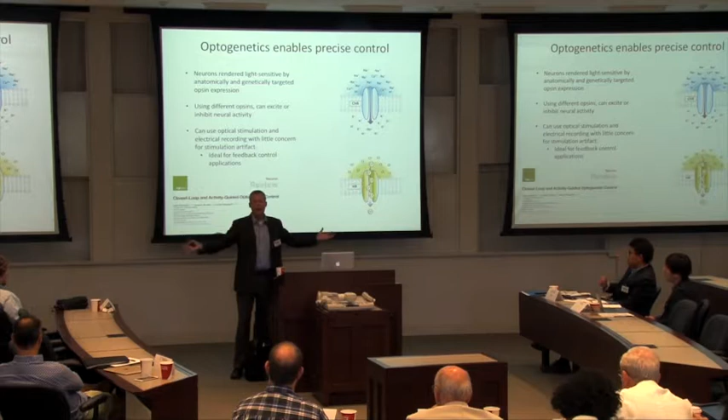What I'm going to talk about is channelrhodopsin, which is an excitatory opsin that we've used. There's a really nice review article for the control folks in the audience from Karl Deisseroth's lab that lays out a lot of different interesting problems and the state of the field. This was from a couple years ago.

In terms of the basic control framework, we have the ability to deliver light, and we have the ability to record from a neuron, acknowledging that with the light we're influencing the activity of many neurons, not just one. But we're recording from a single neuron in this particular example I'll show you.

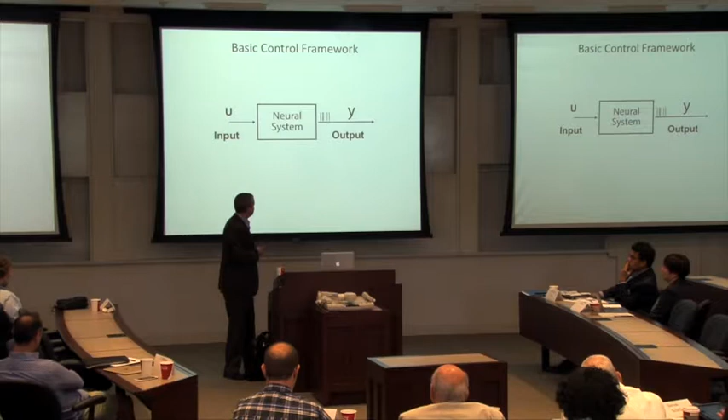So you might first jump into an open loop problem and say, well, it's good enough if I characterize the relationship between light input and firing rate output. There's some kind of static nonlinear function. I can just use it like a lookup table, and maybe I can invert this and design an input trajectory that will give me the desired output trajectory.

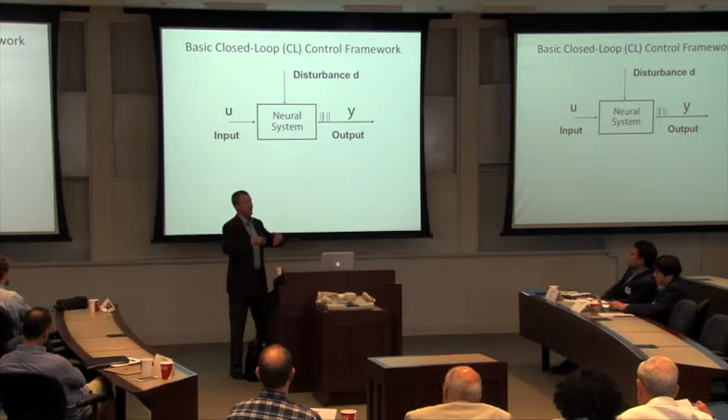And that works well in some cases, but obviously in the face of disturbance, and I mean this in the broadest sense—maybe unmeasurable inputs, for example, which is often the case in the brain, but also maybe more broadly thinking about parameters of the system that are changing over time—the disturbance immediately makes us start to think about closed loop control.

So in this case, we have a disturbance entering the system, but then the ability to measure spiking activity of neurons. We then develop the control strategy around instantaneous firing rate. That's a design choice. We have an observer that translates the spiking activity in real time into an instantaneous firing rate, which we then compare with the reference trajectory, and the controller operates on this error signal.

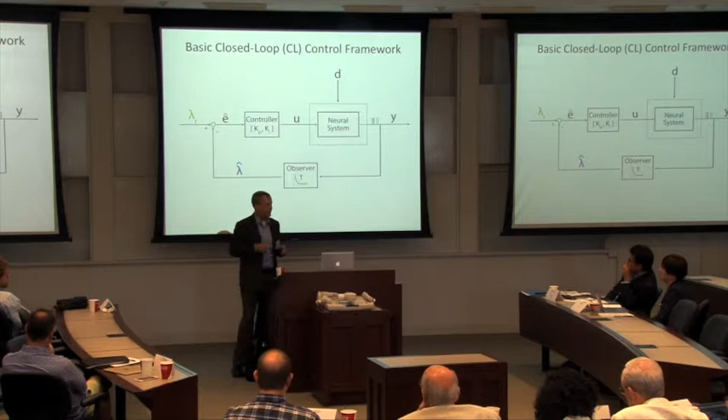And for simplicity, we start with simple PI controllers. There's lots of more sexy things we could do. We have all sorts of ideas on this, but this is a good starting point.

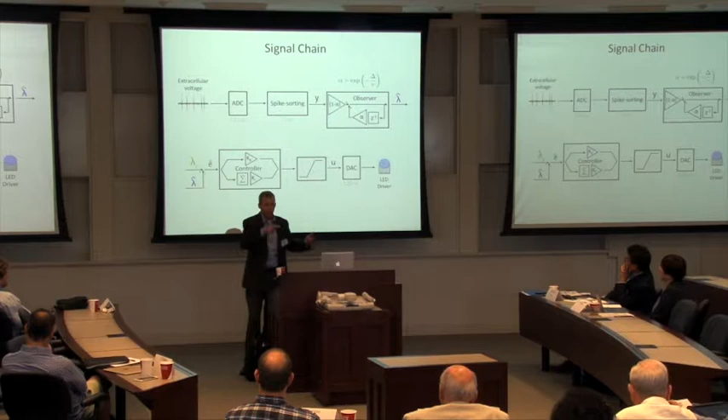So just in terms of the signal chain, there's, in real time, extracellular recordings, A to D conversion, spike sorting in real time, which is tricky, and then the observer. The observer is compared to the reference trajectory, the controller is implemented, and so on. So we've got to turn that around on the order of 10 to 20 milliseconds if we can. Okay, so that's a real constraint on the design.

So just a quick couple of results to talk about. One is, this is a 1 Hz sinusoid. In green is the reference trajectory, that's our goal. In solid black here, the dark black is the closed loop control, and that's the average across many trials, repeated trials experimentally.

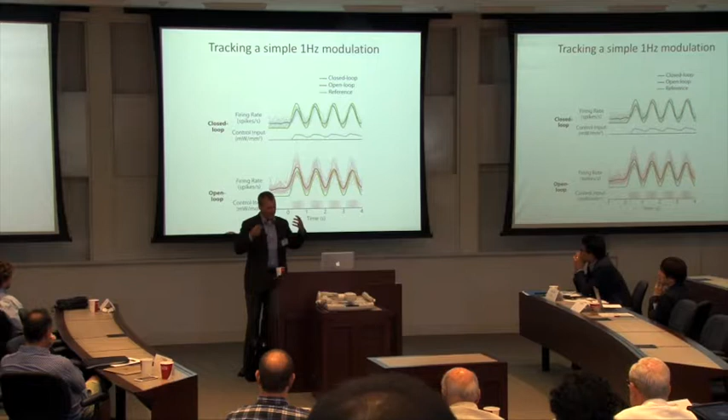The individual trials are shown in light gray. For the open loop shown in the bottom here, we have again the green trajectory is the target, and the thick red is the open loop version. So it's not so bad, right? But one thing to note immediately is that the variability from trial to trial is significantly higher, and that's one thing we've observed in a number of different settings: the closed loop control seems to really clamp down on variability, so we get very tight control of the variability.

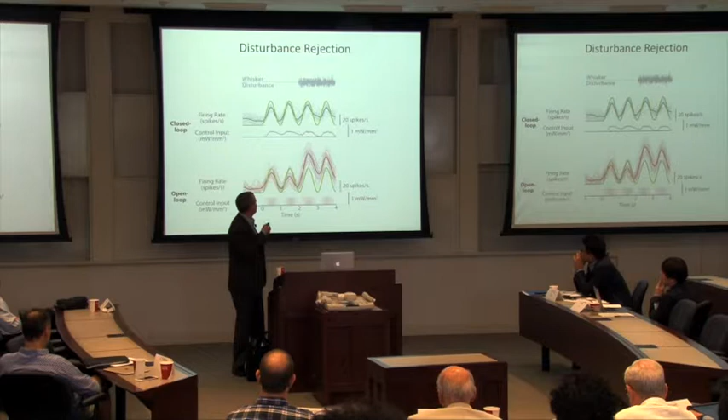So as you might guess, though, the open loop fails when you start to introduce a disturbance. In this case, it's a whisker input, just to demonstrate what this can do. Whisker stimulus starts at 2, wiggling the whisker, driving this pathway. The open loop system falls apart. The closed loop control compensates for that by backing off on some of the input, and you get this tracking of the sinusoid.

Okay, so let me dig in a little bit more and let's talk a little bit about the control setup here. One thing to point you to is that we did publish one paper on this in 2015 with a collaboration with Steve Potter, partly in vitro experiments, but our piece of this was the in vivo. And one of the things we experienced in the neuroscience community was pushback on calling this closed loop control, or at least on the novelty of the closed loop control.

Because in the neuroscientist mind in general, being in the middle of an experiment and dialing up some light level to drive a fiber optic cable in the brain, that was closed loop, right? Meaning that the experimenter's in the loop and that's a closed loop. But we mean automatic. We had to explain repeatedly. So I'm just warning you, when you're trying to publish in this community, you have to be very precise with your language. Don't make any assumptions.

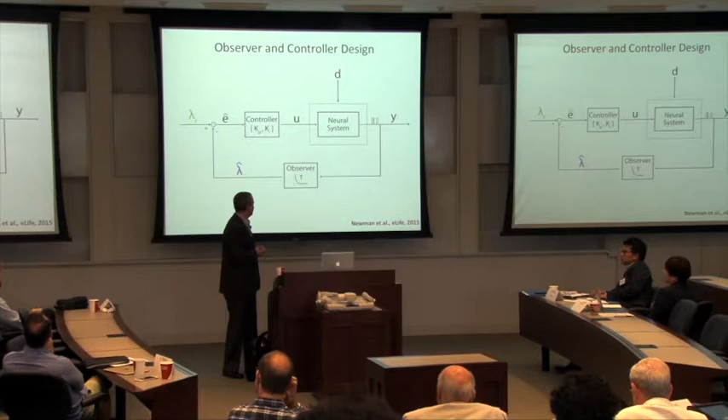So there's two parts of the problem. I won't focus on the observer, it had some hidden landmines in it, but we solved that. It's a little less interesting, and I'll focus mostly on the controller. But just to suffice to say that the observer in this case is really simple: a single parameter exponential filter with a single parameter tau, and we adjusted that to minimize the mean squared error of the reconstruction of the instantaneous firing rate. The more interesting problem has to do with the controller.

And so we built, in the earlier publication, it was all very ad hoc. We got in the middle of the experiment, we started turning knobs on the controller gains. We wanted to be more principled in this case. So we first start the experiment by presenting a white noise light input to the plant, measuring the spiking output, and then fit a model to this.

And this is a simple linear nonlinear cascade. For those non-neuroscientists, for whatever reason, the neuroscience community feels more comfortable when you show a linear filter reversed in time. So these are impulse responses, but they're just flipped in time, followed by a static nonlinear function that has this kind of logarithmic form, and we fit this with maximum likelihood.

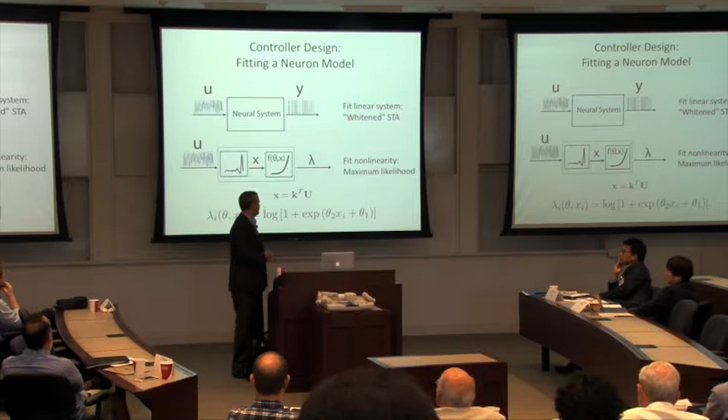So we do this during the experiment really quickly and fit this, and then use the model, which ends up looking something like this, a nonlinear function, linear filter cascade. And we use that to then design the parameters of the controller. The goal, at least initially, was to minimize the integrated mean squared error.

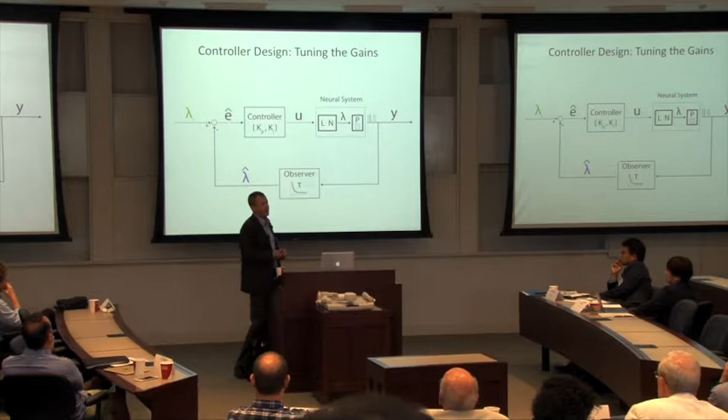One of the things we observed is that the integral component of the PI controller will bias towards the DC, and so you fight that, because the controller really wanted to track just the DC and didn't care about the modulation. So we ended up weighting the DC and the modulating frequency component, with variable weightings that we tuned manually to try to balance out the bias between these. There are probably more sophisticated ways to do this. I'd love to hear some ideas.

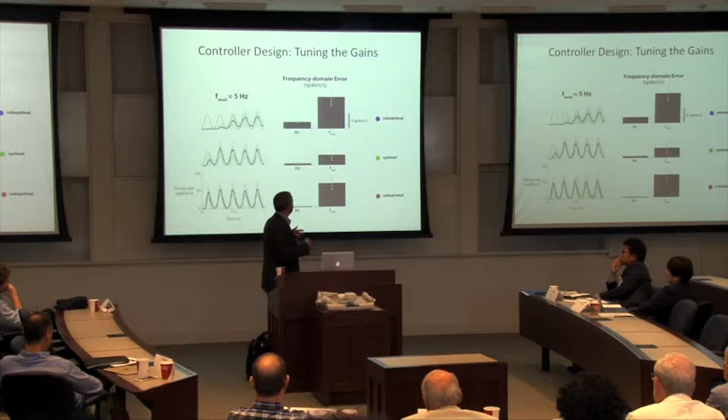We did this to optimize the balance between the DC and modulation, and here's how it looks. This is a 5 hertz sinusoid clicking along. The target is in green, the black line is the experiment, and you see the control effort that goes into this.

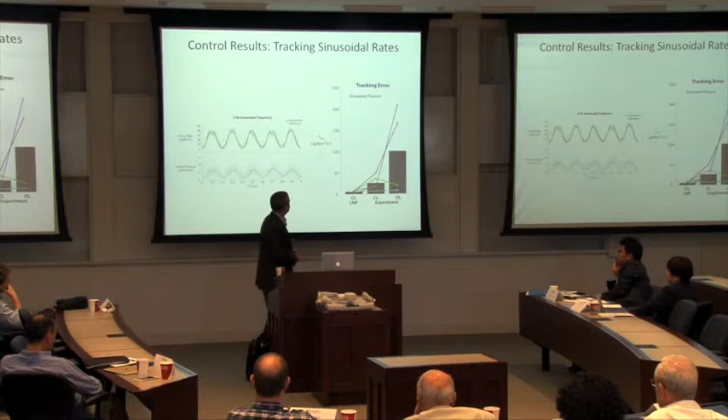In a majority of cases, the closed loop control did about as well as you might expect based on the LNP model fit. So you fit the model and implement that in simulation - it does this well, and the closed loop control in the real experiment does like this. The open loop, in some cases, actually performed remarkably well, but in some cases fell to hell, just completely fell apart.

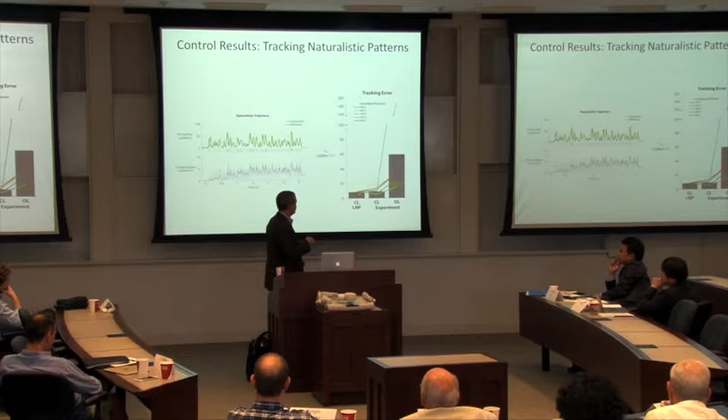In terms of the naturalistic inputs, this green shows the desired trajectory, the black again is the experiment and the control effort. Again, the closed loop control strategy did as well as you might expect compared to as well as you could possibly do based on the LNP model. And then the open loop just didn't do really well at all.

Okay, so I wanted to get to this, what we thought was an interesting thing that opened up here. The model's being used to guide the design of the controller, and obviously there are more sophisticated things you can do here. But one question we had is, well, how good does the model need to be?

One thing I'd like to share is that modeling in neuroscience is actually really - the models are terrible. And one of the things that's really interesting is that there's a lot of model building, but not a lot of model testing. So you read a paper, they develop a very complex model, but in terms of evaluating the actual output of the model compared to experimental data, you often see that step skipped for whatever reason. It's not clear. And when the models are compared, we find that many models, even in the most well-studied parts of the brain, are just terrible. So just brace yourself for that.

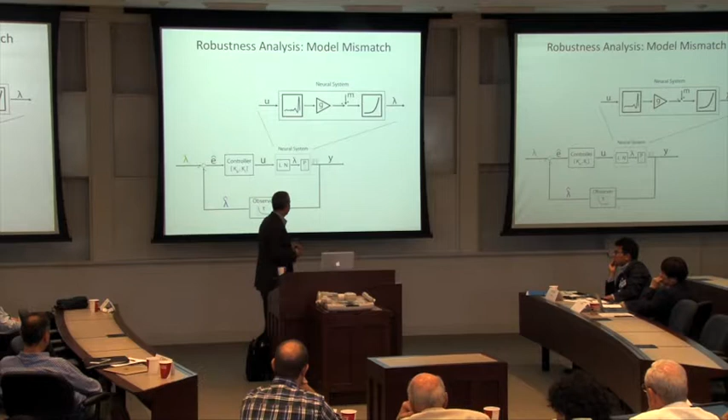But there are also scenarios where we can imagine really dramatic changes in dynamics, so in brain state changes, for example. And so what we wanted to explore is the idea that we can't just rely on closed loop control to compensate for a bad model. In many cases, maybe you need to develop a more complex model.

So in this case, this is pretty fresh, just in the last couple of weeks. But the idea, and this has some place in the control literature, is that we might be switching, the plant may be switching between two different plants, this kind of switched system dynamics. The challenge for us is, A, identify that and distinguish it from just having a complicated system, and B, during the course of an experiment, be able to identify which state I'm in and have a control strategy for that and switch around.

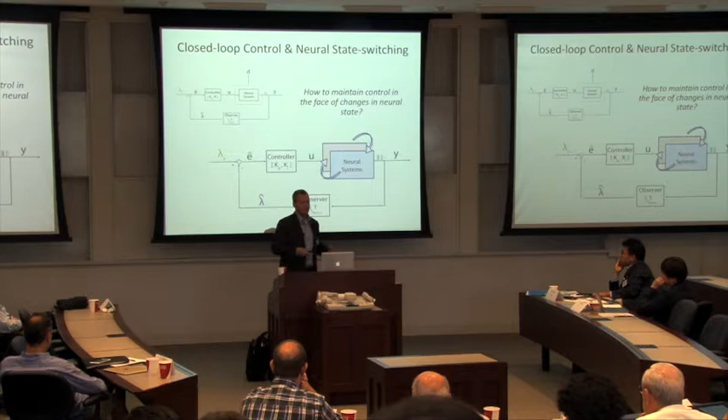There are other ways you could do this too, I'm sure, many ways. So I just want to point out that there are lots of examples in neuroscience where things are changing in pretty complicated ways. For example, cortex changing from desynchronized to synchronized states, up-down states within the synchronized state, burst tonic firing modes, etc, on lots of different time scales. So I think this is really ubiquitous in these pathways.

So an example of this is from the visual pathway, where local field potential is measured in cortex. This is in cat, flipping back and forth between so-called up and down states. A visual input is provided at some point during the course of this. It turns out that the evoked response, as measured by multi-unit activity in the cortex, is quite different depending on whether the input comes along during an up versus a down state. And it's different both in gain, so it's larger in the up state than the down state, but also in terms of latency.

So what consequence might this have? Well, there are examples from our lab and other labs where the ongoing activity, for example in a rat doing a detection task, has to tell you, yes, I felt my whisker move or not. When you parse the data based on hit and miss trials, this is thalamic recordings, the hit trials tend to have a lower baseline firing rate prior to the delivery of a stimulus. So when you just split these out and say, when did the animal get it right, when did the animal get it wrong, they tended to get it right more when there's a lower baseline firing rate prior to the stimulus delivery. So there are real, not only neuronal consequences to this, but perceptual consequences to being able to track this kind of thing during an experiment.

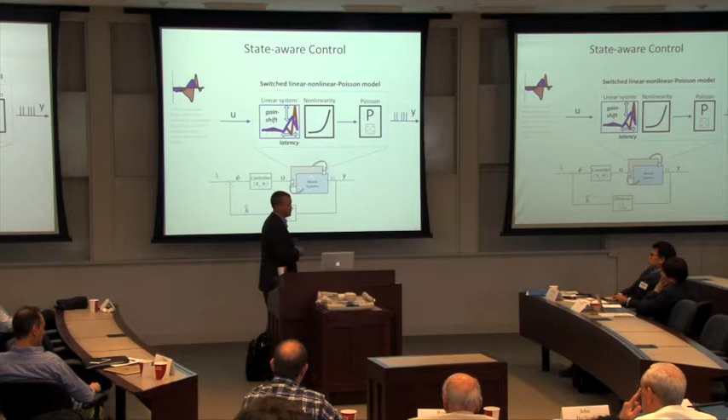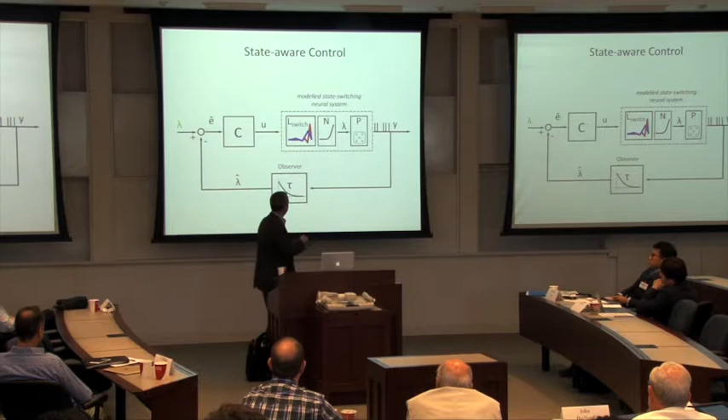We're going to assume for the moment that the setup is like this. There's a system here, and there's two systems that are going to switch back and forth, the red and the blue. There's a controller we need to design, and there's an observer. We're going to assume for the moment that we have a really great observer, so we're not going to deal with that problem right now. Let's just say we have this, and we're really talking about a switched linear system, which I think makes the problem a lot simpler.

Adam then took those filters, turned them into state space representations, and used simple LQR design for this kind of control.

The real story is, as Steve alluded to several times, there's always a backstory. Experimentally, we're having trouble implementing more sophisticated controls than PI control with the system we have. I think this is really where we want to go, and maybe more sophisticated things than this, but right now we're kind of stuck in hardware land.

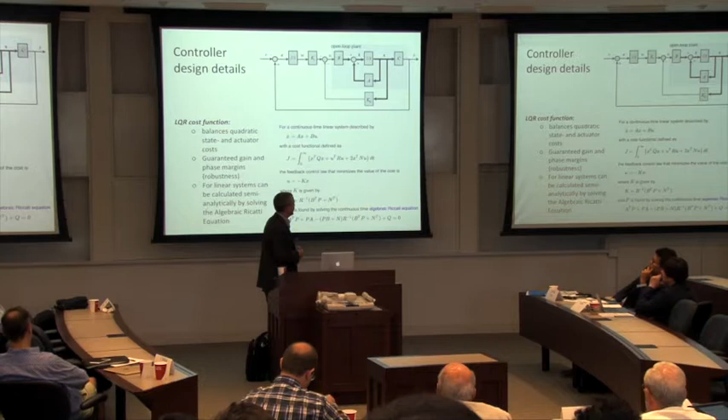So blue, red, blue - these are the states switching back and forth. At every switch, as you might imagine, the controller can compensate to some degree, and the game we're playing here is that the two systems are just changes, gain shifts relative to each other. So the controller does a pretty good job of this.

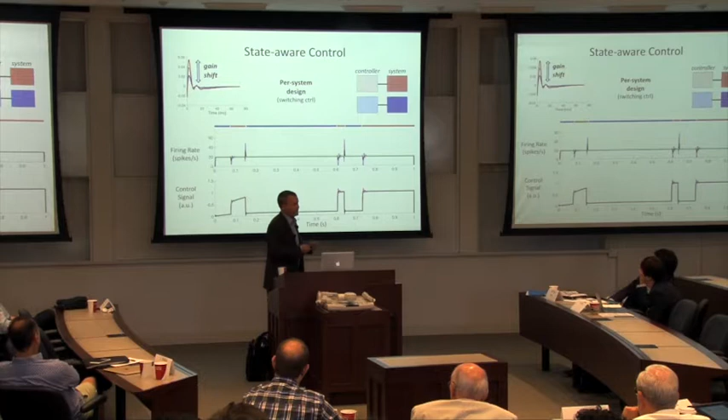It's a simple controller. However, when we acknowledge that there are two systems and we're able to switch back and forth the control - simply determining what state I'm in and using the controller associated with that - we can then clamp down on these transient errors and significantly improve them. But again, this is kind of preliminary data.

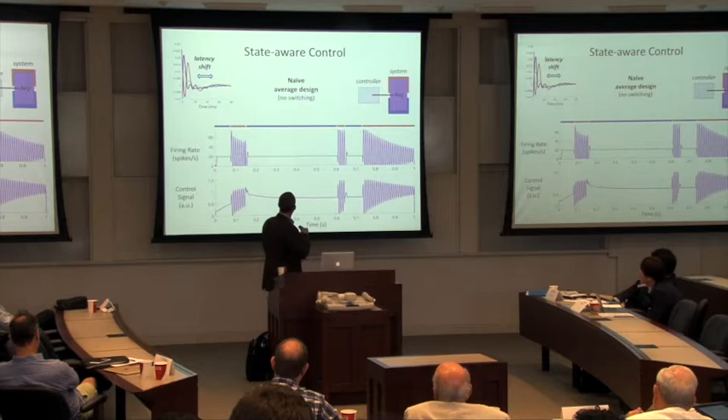More interestingly is when we have latency shifts, or just fundamental changes in dynamics. So red versus blue, I'm switching back and forth. When we switch states here, not acknowledging that, the controller falls apart. It just doesn't track at all.

However, in this case we've assumed knowledge of which state we're in, so that's only solving half the problem. We then implement this two-controller system, and we can actually track that pretty well - the system switches over to the different controller that's been designed appropriately for that plant.

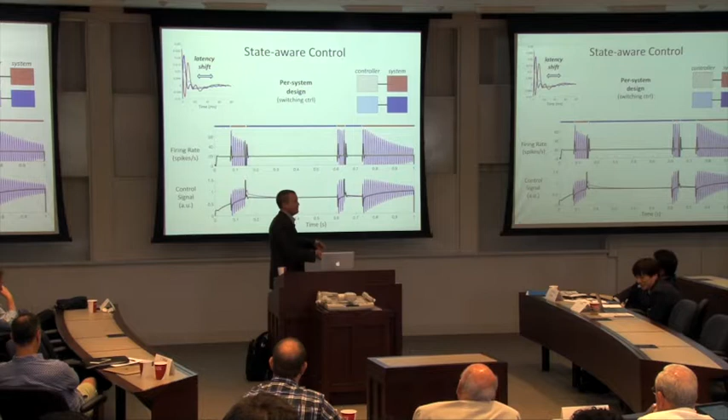Okay, so there's all sorts of things that we can imagine doing from this. I just want to zoom out a little bit and remind you a couple of the results here. The closed loop outperforms the open loop, luckily for us, right? But that's maybe probably an obvious thing.

But I think what's more interesting here is the concept of variability, which may serve an important role in the brain and how it functions. The way I think about this is the closed loop control has significantly reduced the variability. We can always add variability back in if it's important, right? But you can't take variability away. So we've clamped down on this variability and we have better control of that.

The closed loop control is robust to model mismatch to some extent - we haven't fully fleshed that out yet, but small mismatches can be handled. And then control of state switching, I think we're just scratching the surface of this. This is pretty recent, but I think there's a lot of problems to work on here.

And all the results I showed for that last part were simulation, but we're digging into the experiments now. I think this opens the door to a lot of extensions.

So I mentioned bidirectional control. This is with an excitatory opsin, some of the optogenetics work I showed you. There are inhibitory opsins too, and we've done a couple of experiments where we get co-expression - we put these two viruses in there to get neurons to express both the excitatory and the inhibitory piece. So then you get full push-pull, right? With electrical microstimulation, you really get - first of all, you activate everything, and you only get excitation to a large degree. So in this case, potentially, we have two directions.

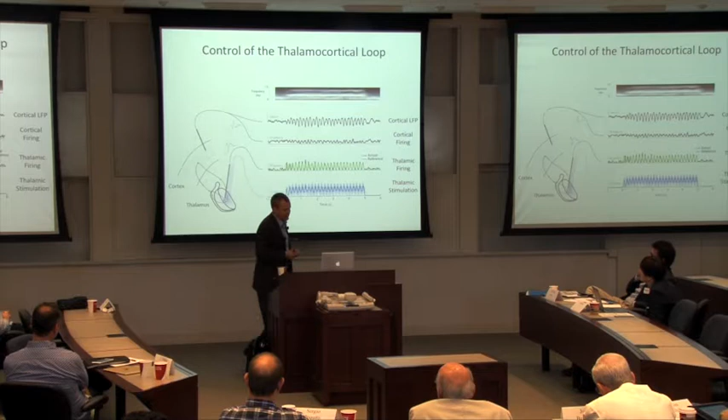So finally, I'd just like to finish up by acknowledging the students that did the work. Michael Bolus did the control, the simple PI control at the beginning. Adam Willis did the state stuff at the end. And this is, again, a collaboration with Chris Rozell. So thanks very much.